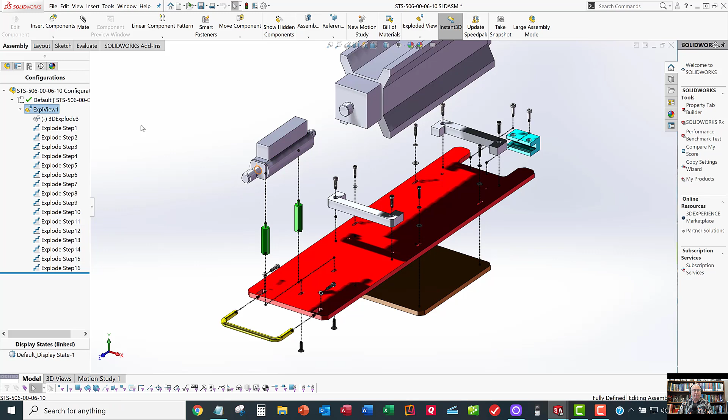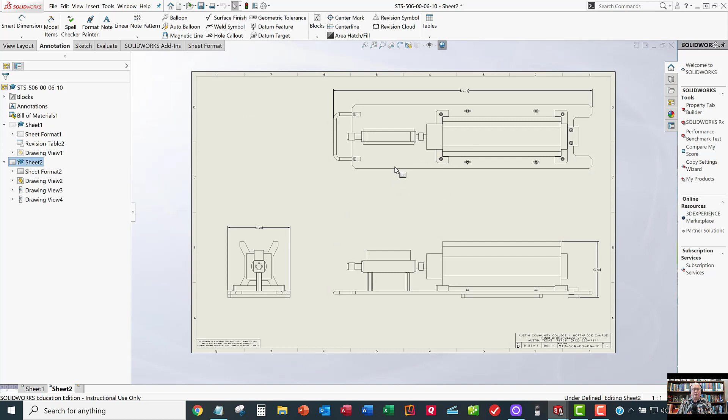And we'll also be going to the configuration manager and learning how to create an exploded view with these exploded line trails, I call them, and we'll be using that exploded view to make an assembly drawing, which will be the third video. And it'll look something like this with bill of materials, balloons, quantities, all the descriptions. And then the second sheet will have an overall front, top, side view with some reference dimensions. So let's get started.

I guess before we get started, let's talk about once you get done with the assembly model, you're going to want to clean up your tree a little bit. These trees get really crowded. On the simple parts we've been making so far, the tree is not near this big. So when you get all these parts on there, it's going to be nice if we clean it up. So let's put these parts in order.

Here's the -1. For some reason it's down at the bottom. So you just drag it up, and I'll put it up here right before the -3s. And there's the 1, 3s, 5, 7, and for some reason the 9 is down here, so I'm going to drag him up. That'll just make it easier to find the parts. It doesn't change anything, it just cleans up the tree.

Another thing you can do is with all these fasteners, I like to group these things together, so you can do something like this. You can drag them and get them all in order. Here's 4 of them. I'll control click all 4 of these, then right click and select, where is it, add to new folder, and then give the folder a name.

That's logical. And now that folder contains those parts, and if you want to take them out, you can drag them out. If you want to add more in, you can drag them in. And that'll help turn your assembly model from a good model to a great model. All right, so that'll take care of that.

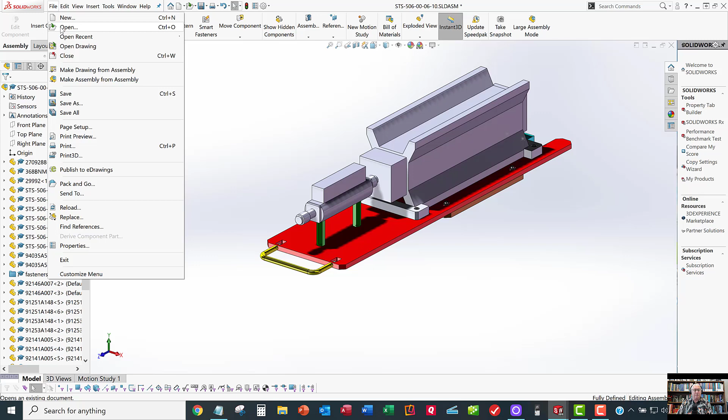Now let's start a new assembly model and see if we can learn some techniques for assembly modeling. We're going to find the inch assembly template. It'll be empty. And the first part we place is going to be the part that you would place first if you were building this in your garage. In my mind, the only obvious choice for the first part is that base plate, because all the other parts bolt to that main plate.

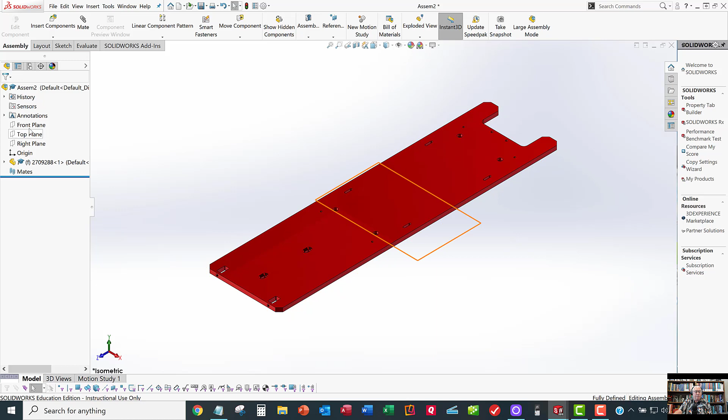So I'm going to place that one first under Insert Components, and I'm just going to click on the screen and place it. Once you place that first part, it fixes it and ties down all 6 degrees of freedom. You'll know it did that because there's an F in front of it in the tree. The F means it's fixed. And it's fixed, which is a good thing, but it's really a bad thing because it's fixed in some oddball location that I don't know.

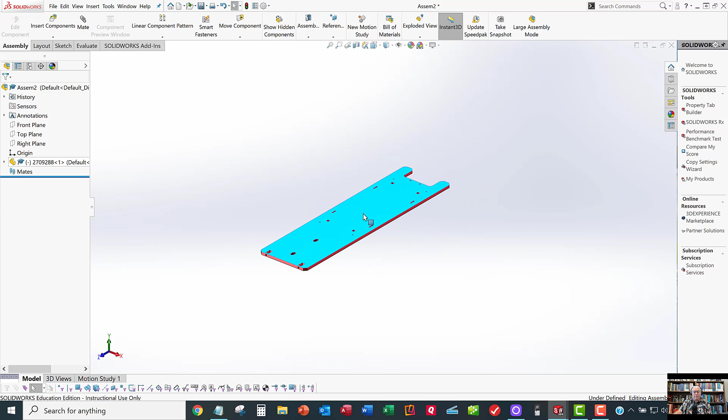I want the planes of the part to line up with the planes of the assembly, and right now they don't. So every time you place your first part in your new assembly, right-click on that first part and float it. That'll put the minus sign in front of it, and now it's completely free to move in all 6 degrees of freedom. And now we can tie it down. Because I put my planes on my part in a logical location, this is going to be the way to go.

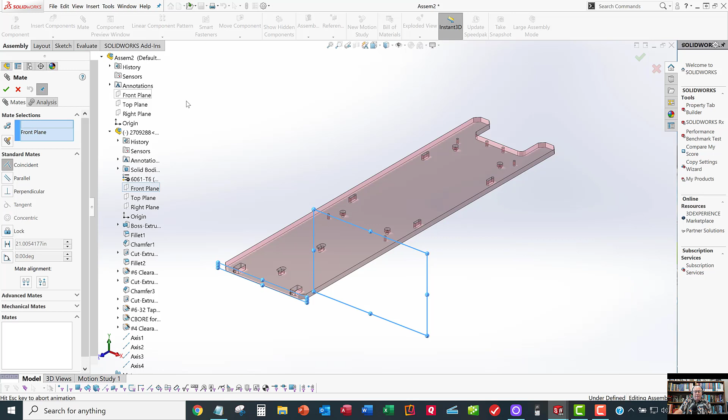So I'm going to grab the front plane of the assembly, control click the front plane of the part, and hit mate. I can choose what kind of mate I want, but SolidWorks generally does a good job of deciding what mate I want. It's decided I probably want a coincident mate with no offset, and that's exactly what I want.

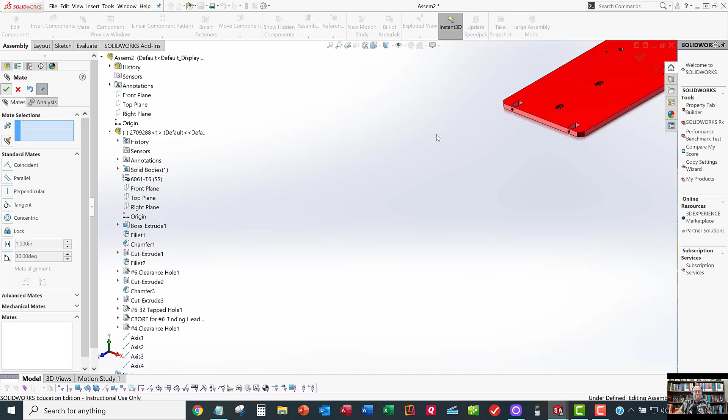If it guessed the wrong way on the alignment, I can click anti-aligned and it'll flip it the other way. But since it guessed the correct way the first time, I'll leave it like that. I'll say OK to approve it, and OK to get out of this command. Double middle mouse wheel to get my view full screen. Now that minus sign is still there. I still need to put some more constraints.

I want to mate the top planes. Top plane goes right through the middle of the part. So when I hit mate, it guessed correctly that I want a coincident mate, but it's guessed incorrectly about the orientation. These slots on the top need to be on the bottom. So I'm going to flip that direction.

Excuse me. And I like that much better, so I'll approve that.

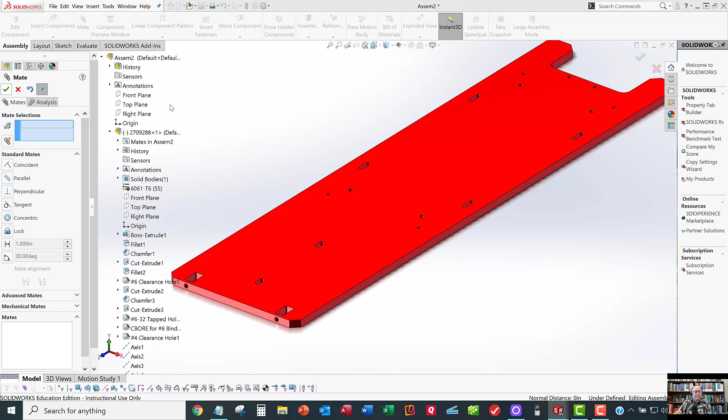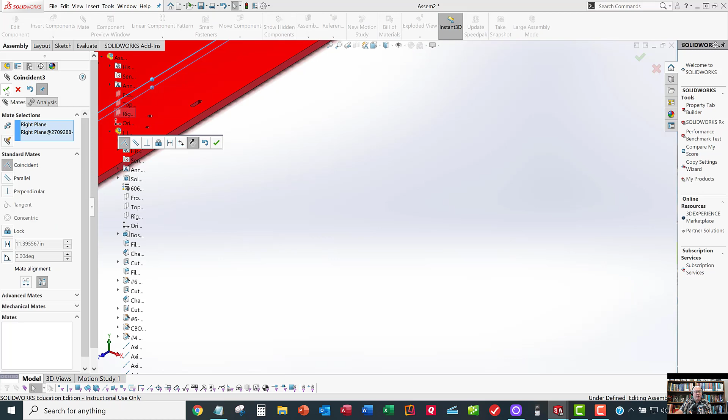As we talked about in class, the first planar mate got rid of 3 degrees of freedom, and the second planar mate got rid of 2 more. Now we only have 1 degree of freedom left, and this last planar mate will take care of that. So right plane to right plane, mate. Now that minus sign will be gone on the part in the tree because it's fully constrained, all 6 degrees of freedom are now tied down.

Now we just choose the next part we want to place, and the logical choice in my head is this big RF load, because that's the part that a lot of other parts mount to. So to me that's a logical choice for the second part.

Remember, on these parts I'm giving you, these step files, I'm going to give you these two NARDA parts as step files. Before we do any assembly modeling, you need to open up the step file to verify the error checking, do not do feature recognition, and then save it as a SolidWorks part, and then place that part in this assembly model, not the step model.

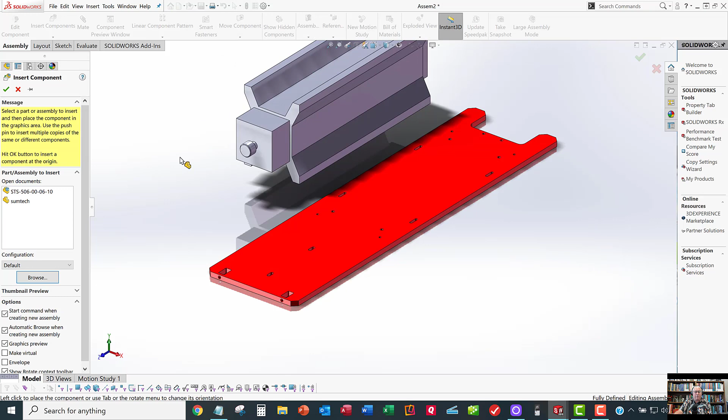So here is the RF load. I'll click on the screen to place it, and we need to tie down 6 degrees of freedom. The first thing I would do if I'm assembling this for real is take the bottom surface of the load and mate it to the top surface of the plate. I'll hit mate, and it's going to guess I want a coincident mate, which is what I want, and I'll approve that and say OK to get out of the command.

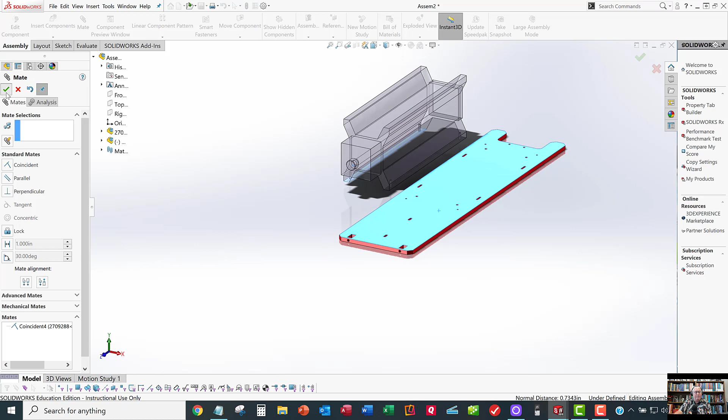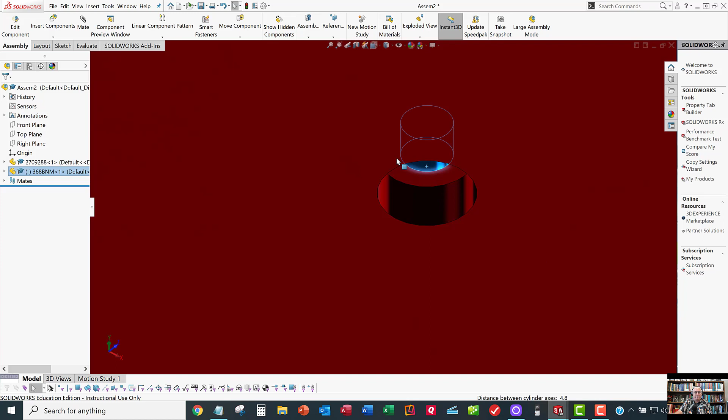Now what I want to do is, again, what I would do if I'm building this thing. I would line up this screw hole here with the hole in the plate that it's going to mount to. So I'm going to select that first cylindrical feature, control click the second cylindrical feature, and when I hit mate, it's going to assume I want to line up the axes of those two holes. And that's exactly what it does. I can see that's happened, and I'm going to approve that and say OK to get out of the command.

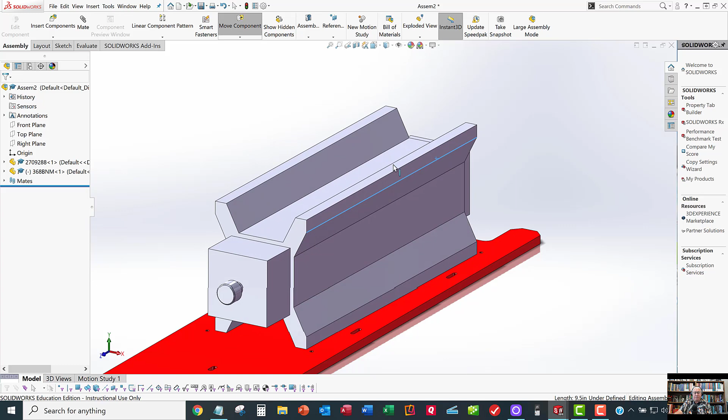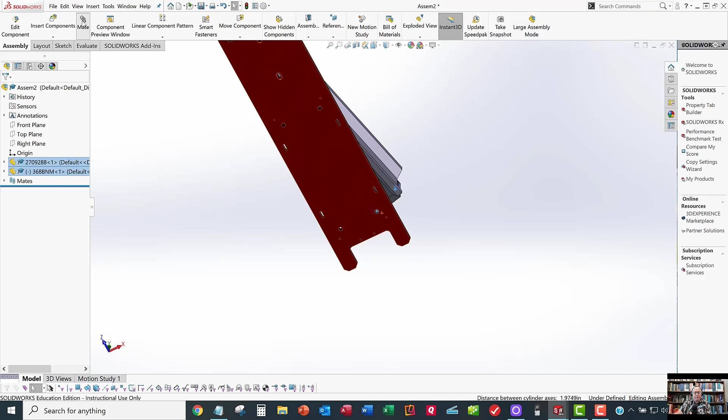Now one planar mate and one cylindrical axis hole line-up got rid of 5 out of 6 degrees of freedom. The last degree of freedom I can tie down by lining up this diagonal hole at the back. So I'll go across the other side and zoom in here. I'm not grabbing this edge, I'm grabbing this cylindrical feature. I'll click that one, control click that cylindrical feature, and when I hit mate, it's going to swing that thing around, line it up, and get rid of that last degree of freedom. OK to approve, OK to get out of the command, and now that minus sign is gone.

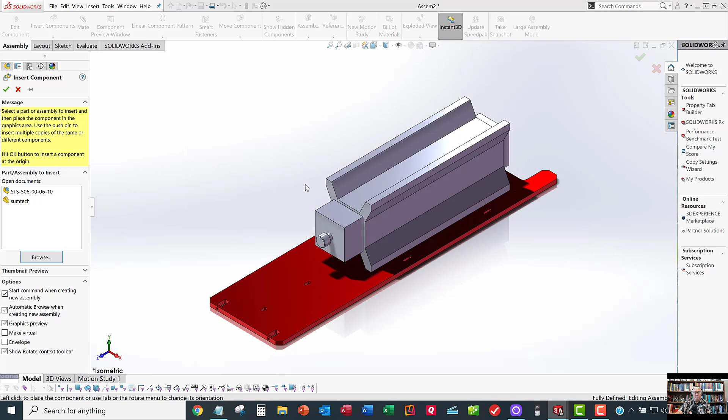So let's keep going. Seems like the next part might be this NARDA adapter. Insert components, browse. If I had the parts already open, they'd show up in that tree, but I don't have these parts open, so I got to go find them. They're all in the same folder. Make sure all your parts stay in the same folder like we talked about early on in the semester.

All right, so this one's got a minus sign, 6 degrees of freedom are still loose. You got to make sure to look on the data sheet to find out which end of this connector, which end of this adapter goes where. You don't want to get it on there backwards. So I'm going to mate that cylindrical feature to cylindrical feature, meaning those axes are lined up.

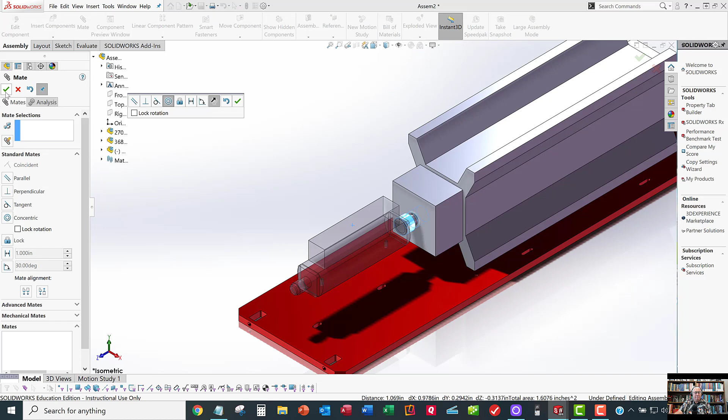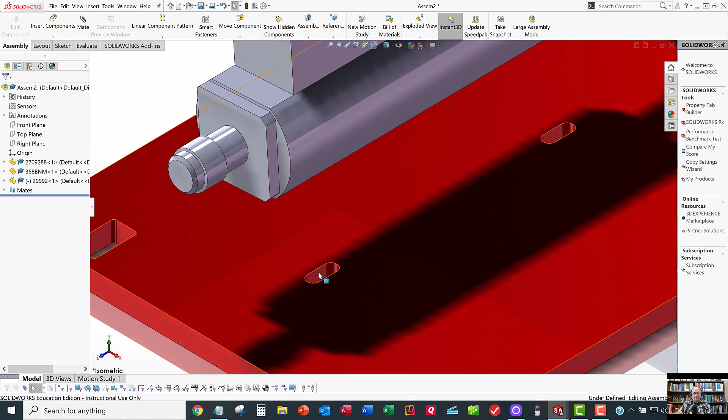Now, I don't know how far this thing threads in. This is a threaded feature here, and those mate together, some unknown distance. But I've already designed this plate such that the in and out location is defined by the standoff. When you mount the standoff in the middle of that slot, and the top male portion threads into the bottom tapped hole there, that takes care of the front-to-back location. But there's still one other degree of freedom I haven't tied down, and that's this rotation.

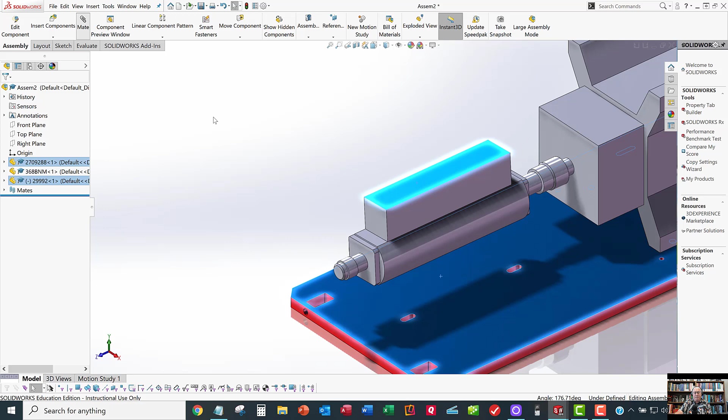So I don't want that thing to rotate, so I can do another mate. I can select this top face, control click this bottom face or the top plane, either one. If I mate those together, it cannot make a concentric coincident mate because that would break the axis alignment. So instead it assumes I want a parallel mate, which is correct. The minus sign is still on this part because it needs those standoffs, and I'll just leave that loose for now.

All right, let's add the last part, and then we'll put some fasteners on here and call it good. So let's go to insert components. Let's put this handle on there.

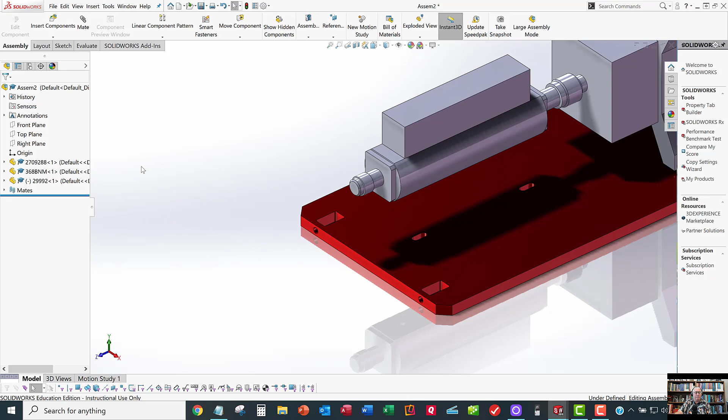And the handle, I think, was the -1. Did I hit the button? Maybe not. Here we go. Browse, go find the -1. Looks like it right there. And then I'll click on the screen and place it.

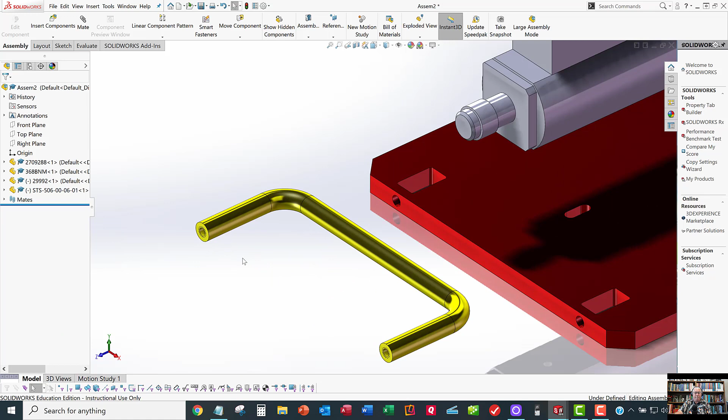It's got it backwards, but I don't care because the mates are going to take care of all that. So the first thing I'd do, if I was assembling this for real, I'd grab that handle and shove it and touch off on that face. So I'll mate those together, see if it flips it around. No, it didn't, so I guessed incorrectly, but that's okay, I can flip it.

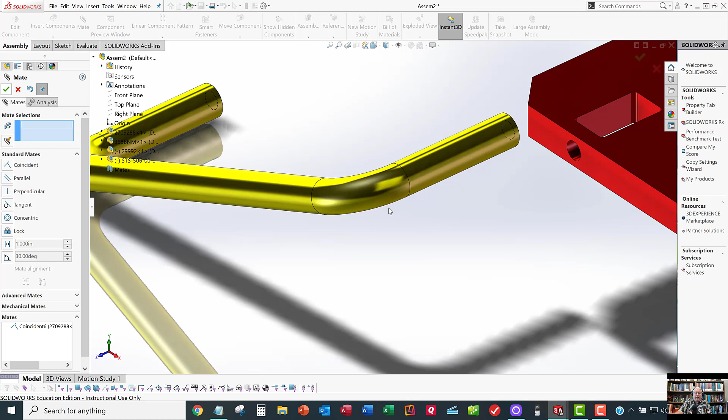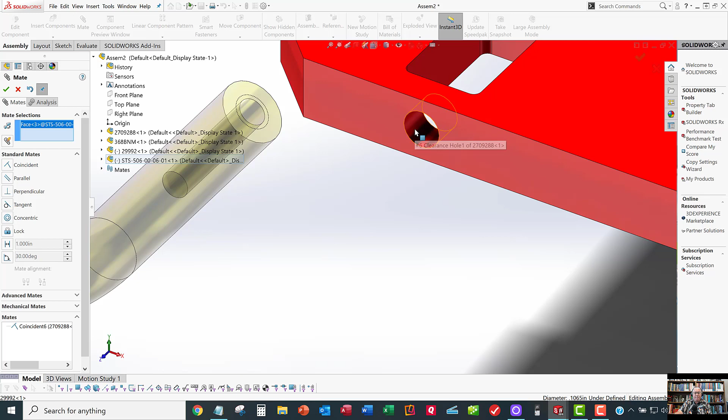And approve that. I'll stay in the command and grab this cylindrical feature, and control click this hole over here. That will line up those axes. There we go, have both features in the tree. I'll approve that, and now I'll get out of the command and we'll take a look and see how many degrees of freedom are left.

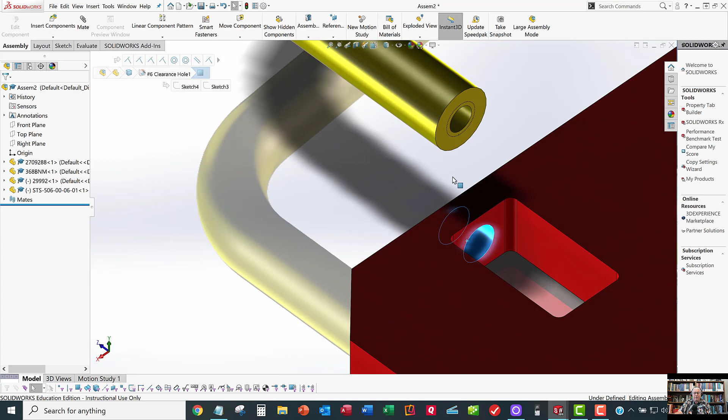One planar mate and one axis alignment, so it's only got 1 degree of freedom left. It can still rotate. So I'll grab this cylindrical feature and control click this other cylindrical feature. I could grab the outside cylinder, it doesn't matter because they both share the same axis, but it makes logical sense that the hole is lined up with the hole. So I'll make those, and that minus sign on the handle will go away because now all 6 degrees of freedom are tied down.

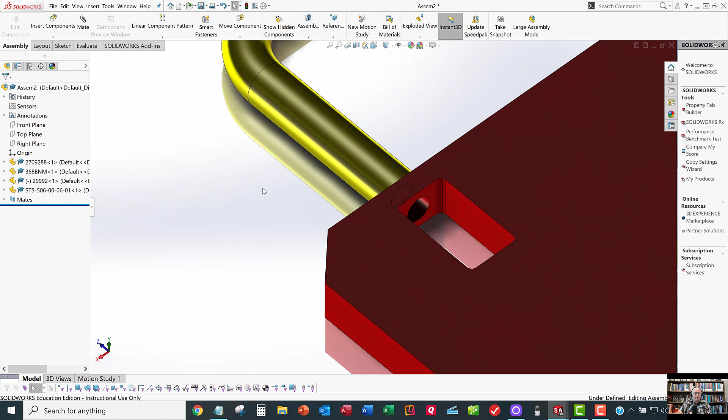And there we go. So now maybe the last step, we'll put some fasteners on here to learn how to do that. So I'll hit insert components, and I don't remember which one of these washers is the right one, but you can ask your team member, whoever made the handle will know what washer and fasteners to use.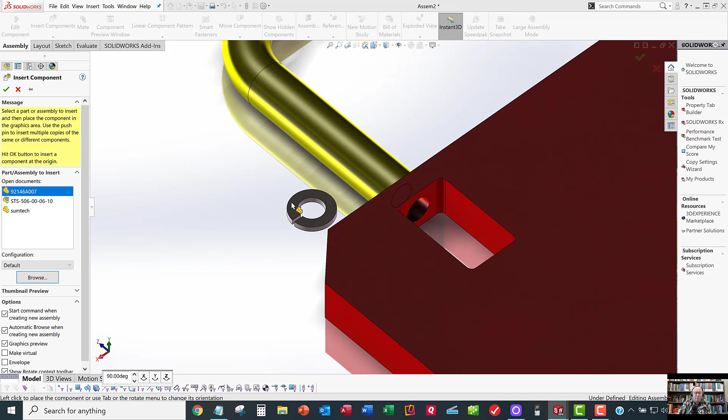How come this thing is not... here we go. Browse, and let's see, I don't know which one of these it is. 48. I don't know which one it is. That looks like the fastener. I'm not sure which one of these is it. Alright, there's a split lock washer, we'll pretend like that's the right one.

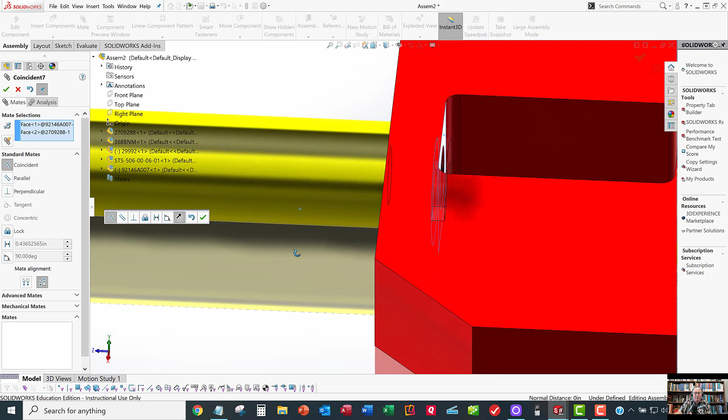Alright, so now we're going to mate this. This face here, this red plate, tells the washer where to go. So that face, control click that face, mate, and see if it guesses correctly. Look at that, it flipped it around. Solidworks is pretty smart. That thing is on the correct side, so I'll approve that.

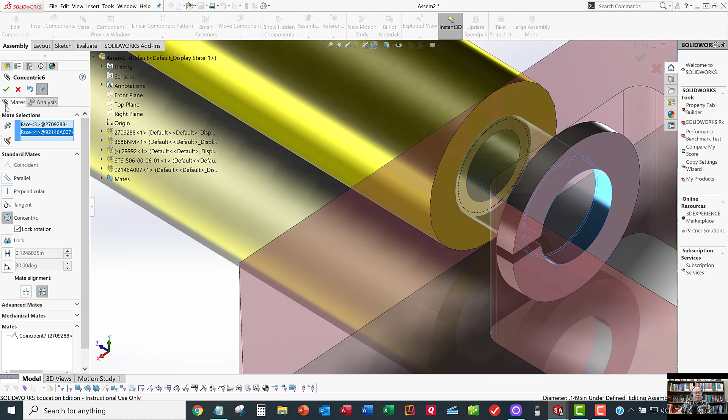I'll stay in the command and select this cylindrical feature, and then select the other cylindrical feature, control click it. When you do this concentric mate for the fasteners, it can still spin, and to keep that thing from spinning, you're going to want to click this lock rotation button. That'll tie down that last degree of freedom without having to do a separate mate. Okay, so that one's done.

Now let's place a fastener and see if I can figure out which one is which. It's one of these guys here. I'm not sure which one. I don't know, let's try. Whoever made the handle will know, so ask them. Oop, that's not it, is it? Let's try another one.

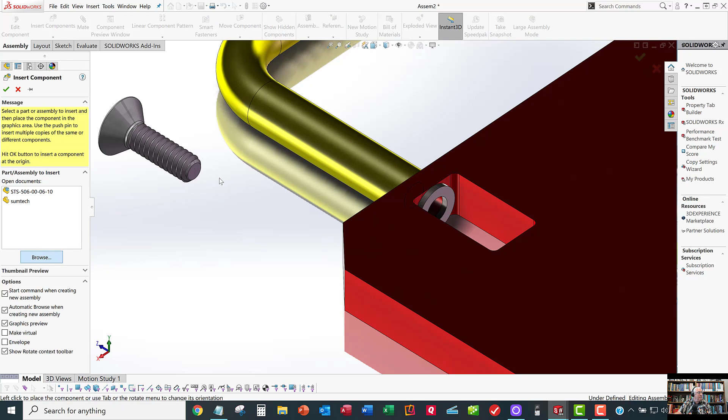Insert component. Browse. That looks like the one for the standoff. 148. 51, maybe that's it. It looks a little better. Alright, we'll assume that's it. We'll delete this one for now.

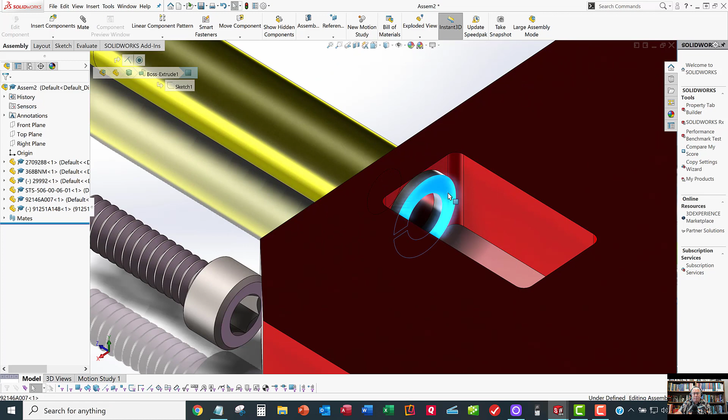And so now we want the washer to tell the fastener where to go. It's the way I look at it. So that face and that face mate.

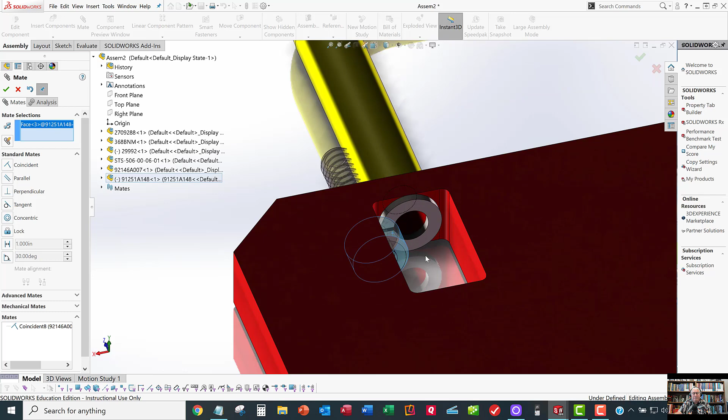We'll approve that, and then we'll do a cylindrical feature with a cylindrical feature. I'm not going to grab this thread because it's too complicated, I'll just grab the head of the screw. So that's cylindrical feature with that cylindrical feature, that mates. Make sure to lock rotation so that all your degrees of freedom are tied down and the minus signs are all gone.

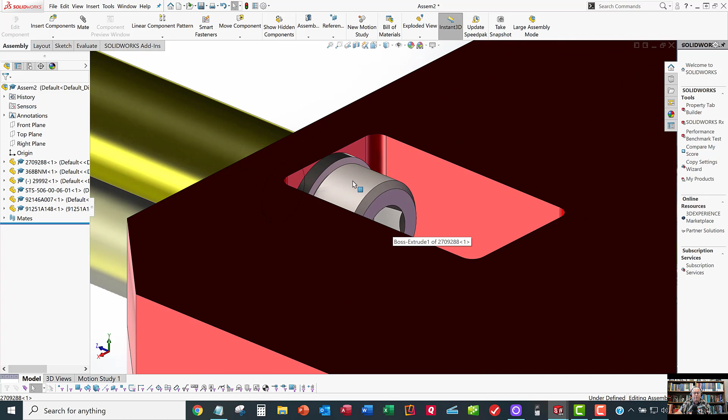I've got to do that again on the other side. It's going to be a pain in the neck, and I don't want to do it because I'm lazy, so let's show you another trick. I'm going to select the fastener, select the washer, control click the washer, now I've got both selected. I'm going to go to insert components, but use a pull down and say copy with mates. Since I pre-selected the two parts, they're already in the blue box, so I can go next. Now it's asking me that the mates between the two parts are going to automatically get added to the new pair.

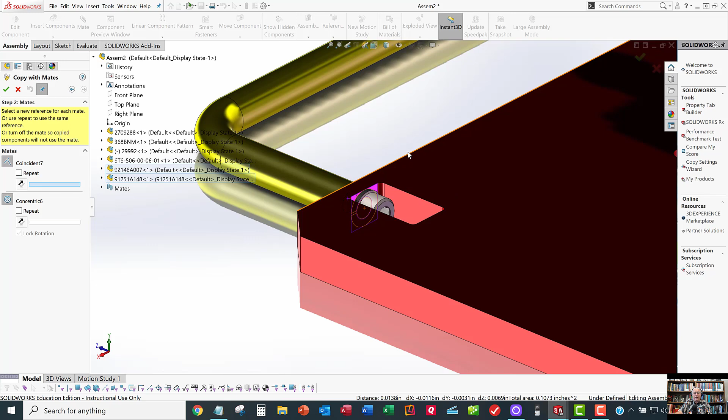This is asking me what to do with the other two mates. This was the first mate for the washer to the plate. I don't want to repeat it—if I did, I'd check repeat. Instead I want to replace that first mate with this mate over here, so I'll click that face and that'll put it in the blue box. Now it popped down to the next one. I don't want to repeat that cylindrical mate on the other side, I want to change it to that cylindrical surface right there. Pulls both sets over, I approve it, and then I'm done placing pairs, so I'll get out of the command.

I highly suggest doing that on these stacks of fasteners, especially like the ones for the bottom plate. You're going to have two washers and a fastener. Do the stack just like I did here—select all three, copy with mates, boom. You can do them much quicker than doing them individually.

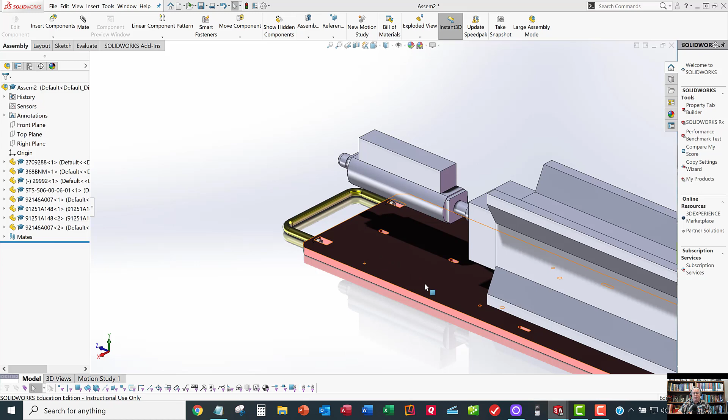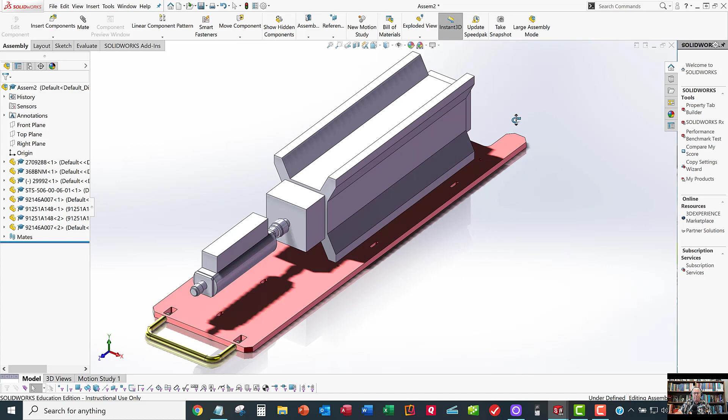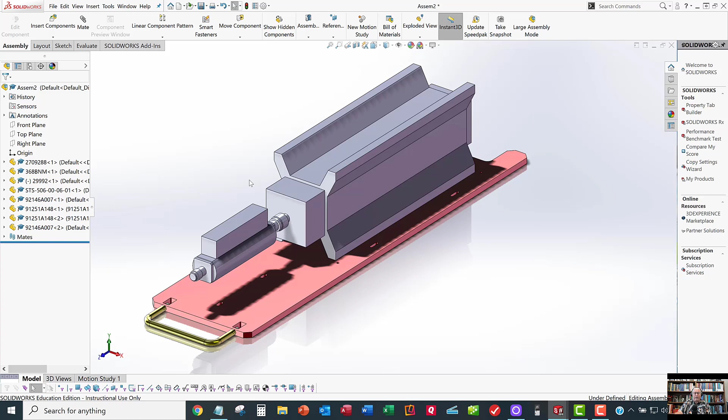All right, what else do we need to talk about? So you can add the rest of the parts. As you're assembling this thing, when you see errors—if things don't fit, if fasteners are too long or the wrong size—you need to catch that as you're putting your assembly together. You want to catch errors while you're doing your design, not when the thing has been fabricated and all the parts are on the manufacturing floor, and somebody calls you on Sunday afternoon saying the washers are the wrong size and these parts don't even mate together correctly. You want to find that out while you're doing your design, not later. So as you find errors, that's a good thing—bring them up to your team members. We'll correct the models, or you will correct them as needed, and then get new copies to everybody, and then move on.

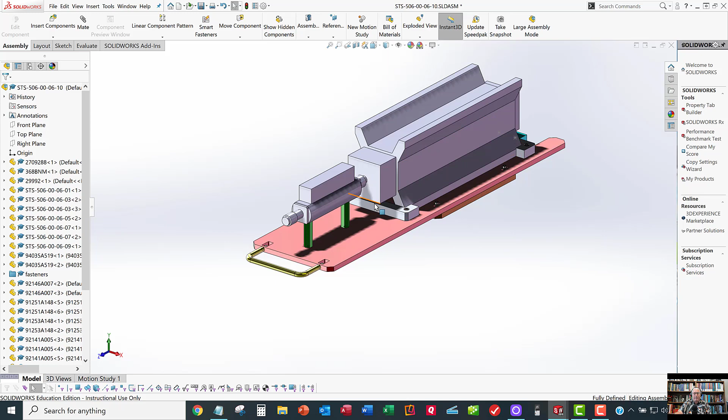All right, so one more thing before we finish this video and start another on the exploded view. Let's talk about how to do these colors. When you make all your custom parts, they're all aluminum and all the same color, so it'll be difficult to see where one part stops and the other starts. So before you hand parts off to your team members, give them a color. The way we do that is in the part model—you can do it in the assembly model, but I prefer the part model.

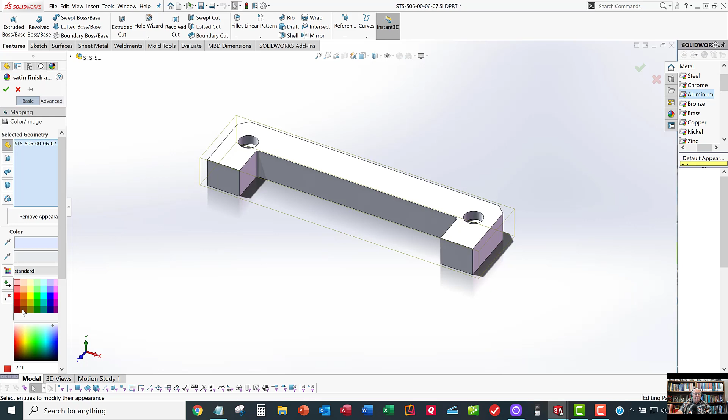When you assign your material, in this case 2024 T4, it tries to make the color of the part look like 2024 T4 aluminum, which is okay, but they're all going to be the same silver gray color. The way you change the color is hit the display manager, right click and you're on the appearance manager, right click on that finish and say edit appearance. Instead of satin finish aluminum, it'll give you a pop-up with some colors—pick a pretty color, and make the whole part that color. You can make individual faces different colors, but I just like to make the whole thing one color. Grab a color, and you can pick only faces or whatever, but I just leave it on default. The whole part is going to be red.

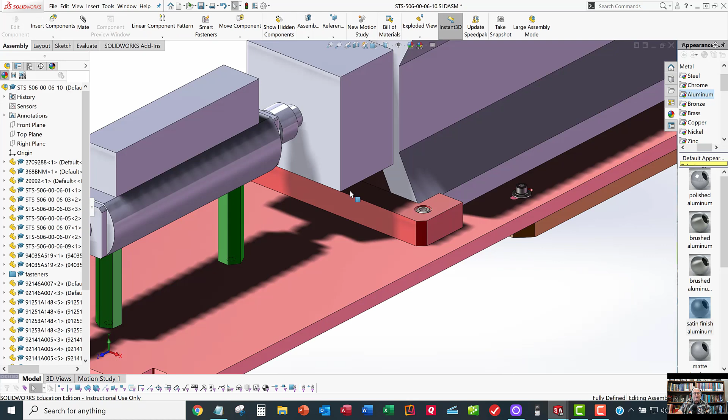I'll approve that, and since this part reports to the assembly, now the color is red in the assembly. That'll be nice—everybody choose a different color so that all the parts have different colors.

All right, so that takes us through step one. We will go ahead and put the rest of the parts all together, and then when we're done with that, we will watch the next video, which will show how to create that exploded view within the assembly model. That exploded view is not a separate file, it just lives in another spot inside the assembly model. So until then, enjoy.